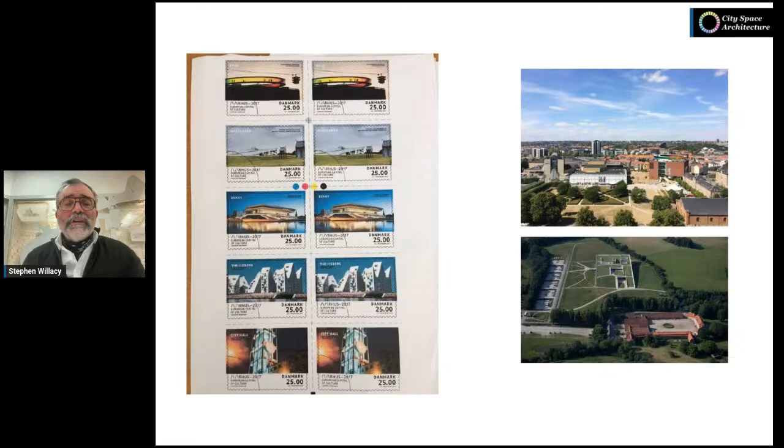We're also a renowned center for business, with lots of different business clusters. We are the world's windmill capital in Aarhus, with research and development for nearly all the windmill companies, and it's also an important harbour town of course. We have an agro-foods park, lots of different design and robotic studies going on in the university itself. But of course, when we talk about our city, how it's growing, and how we can communicate with each other, the Sustainable Development Goals has become quite an important tool.

So we're roughly speaking the same language with each other. I think it's important that we bear this in mind as the whole paradigm of putting people first when we talk about making our cities. We've often asked this question, borrowed from Jan Gehl: look at the city life before looking at the urban spaces, then we can look at the design of the buildings. Obviously it's not linear, it spirals back and forth. But for many years, it's been a case of designing buildings and there's some space left over. I'll return to this theme as we go along.

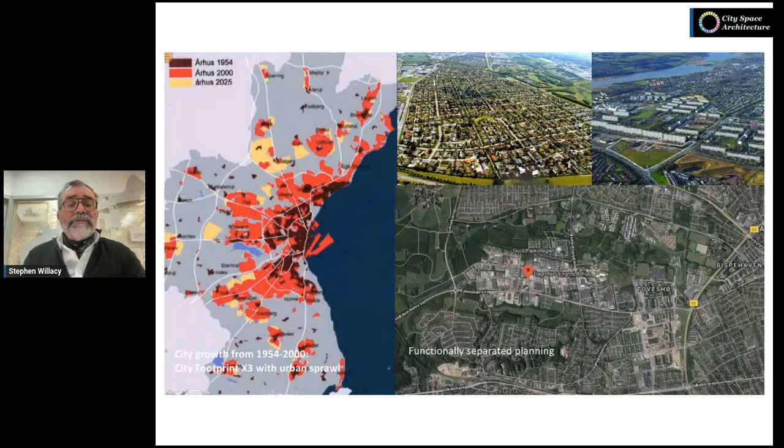This is an image of Aarhus from just post-war. The dark area illustrates the footprint at the time, and then 2000 shows the actual footprint, because we built all these single-family homes, which is very popular, along with functionally separated planning, where we have social housing along the outskirts of town, along the ring road, and also industrial areas on the outskirts. The yellow areas, which I'll come on to, are areas with polycentric development taking place as we've been planning forward.

So managing the growth: the image on the left illustrates the way planning has been post-war, and now we're trying to convince ourselves, or work closely with the idea of mixing different activities—work, recreation, living—so you can make it more walkable, accessible, cyclable. We like to work with this, making more vibrant, sustainable neighborhoods. Some people call them 15 or 20-minute communities. Others—I'll show it later—we're also discussing the idea of 5-minute communities where everything's very accessible.

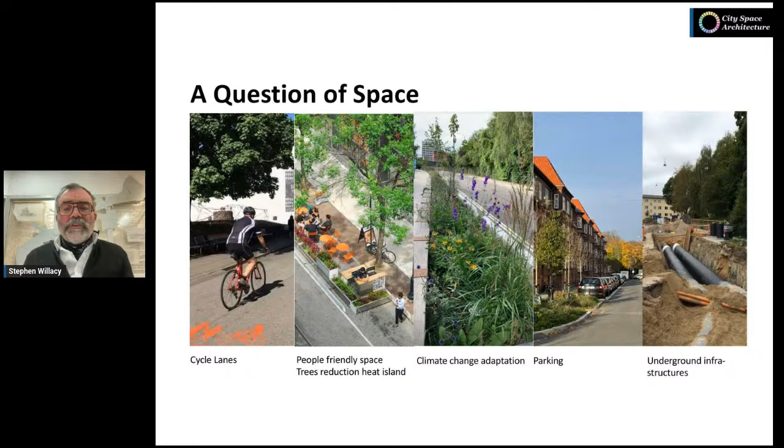And of course, people would like to have cars in their neighborhood close by. But there's also a lot of infrastructure underground, which makes it difficult to plant trees on top, and they also have to be serviced. So with all these different things, what gives? How do we make the mix work?

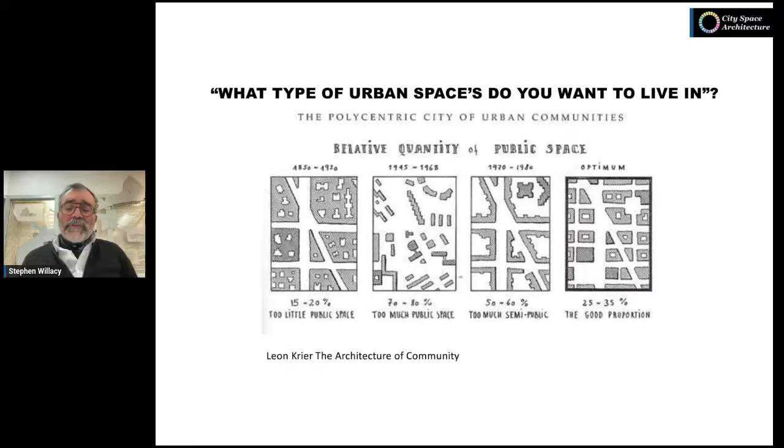The other discussion is the quality of the urban realm. These are illustrations from Leon Krier from his booklet, The Architecture of Community. These are very key illustrations, and I've used them quite a lot to illustrate the challenges we've been facing. You can see here typical examples.

The one on the left is from the old historical heart of Copenhagen, where there's too little public space. The next illustration is from Gellerup Park in Aarhus, where there's a lot of public space, and too much semi-public space. This is an image I found from Ørestad in Copenhagen, but I couldn't find a decent image in Aarhus. These are just some examples.

Whilst the one on the right-hand side is a project I'd like to illustrate towards the end of this talk.

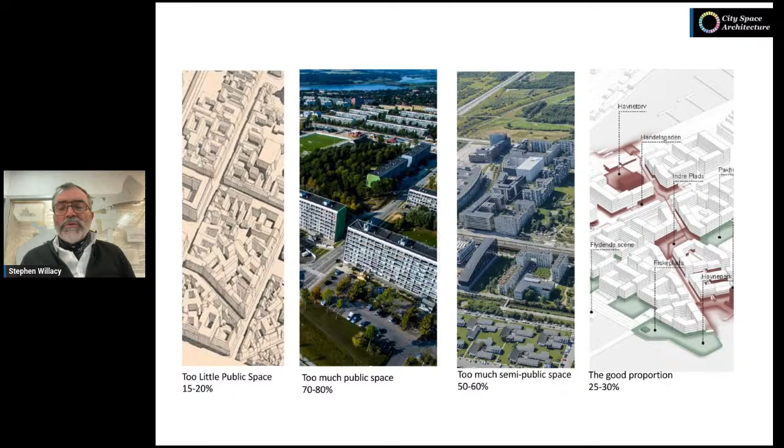I'd like to make this abrupt comparison between the readable and recognizable city from those early illustrations shown previously, and the indistinct city with blurred boundaries between public and private areas. You can see this with the typical modernist housing scheme from around the 60s and 70s. It's important to remind ourselves of these ideas, which are coming into play more and more, because we're having to repair upon these ideas which have caused some challenges for us.

One of my icons in urban planning is these ideas developed by Hermann Hertzberger and many other architects, the discussion relating to thresholds. I think it's very important when we distinguish between the idea of public and semi-public areas.

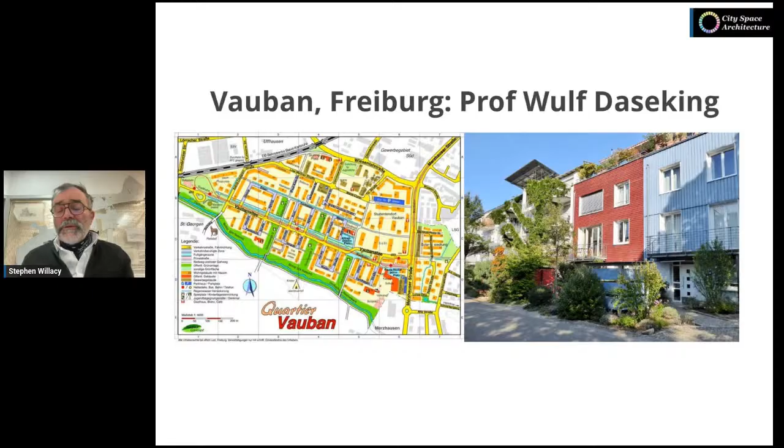Another beautiful example is this one in Vauban, Freiburg, where Professor Wulf Daseking worked with a lot of people developing two new towns, polycentric towns on the outskirts, but linked together with the inner city by public transport. This is something we've looked at very closely.

It's a beautiful example of how they've managed to think holistically, keeping the density at a reasonable level, but also integrating all the climate challenges into surface drainage in the area.

The car parking is in parking barns on the outside edges of the community, so there's very little need to drive into the centre. It's important to remember they've also incurred quite a large expense on parking spaces, so a lot of people decide to use public transport instead.

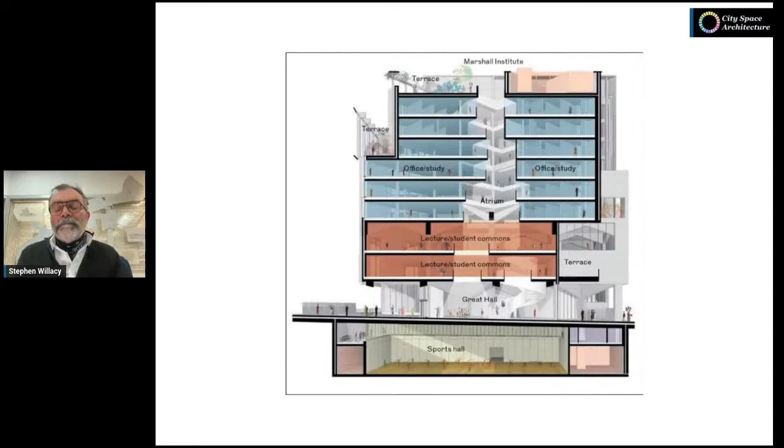And you can see that through the section of the building, the urban realm runs through the building. It's accessible, you can wander through it and look up through the building itself. The common areas are the areas in red, and there are two floors above which are accessible by a beautiful staircase. I love the landscaping here that explains this possibility.

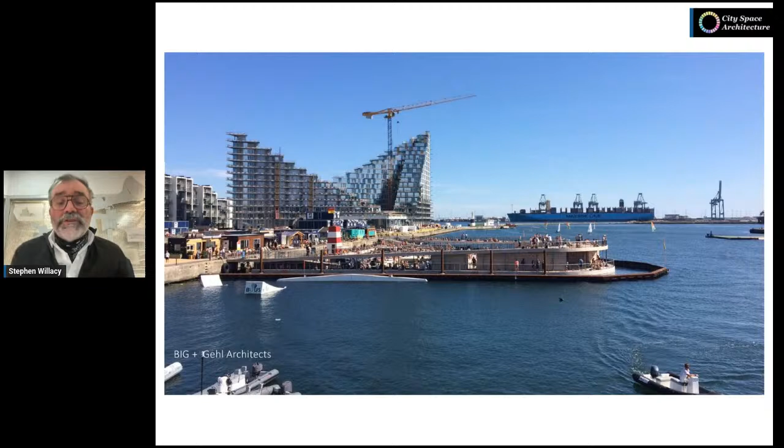The former container harbor on the right, out in the bay, we have this beautiful harbourfront along Basin 7, where we had the fortunate sponsor of a Salling Foundation to build this basin. And I must say it's been a magical success.

When we talk about the urban floor, here you can see timber floor, obviously near the basin. Along the edge of the building site, the council, together with the developer, built this idea of, whilst we're waiting, making a livable building site fence. So these containers and different activities were developed with very cheap rents, encouraging people to use this space whilst the projects were being built. It became a fantastic destination in itself, very quirky and interesting compared with the very polished newer developments in the background.

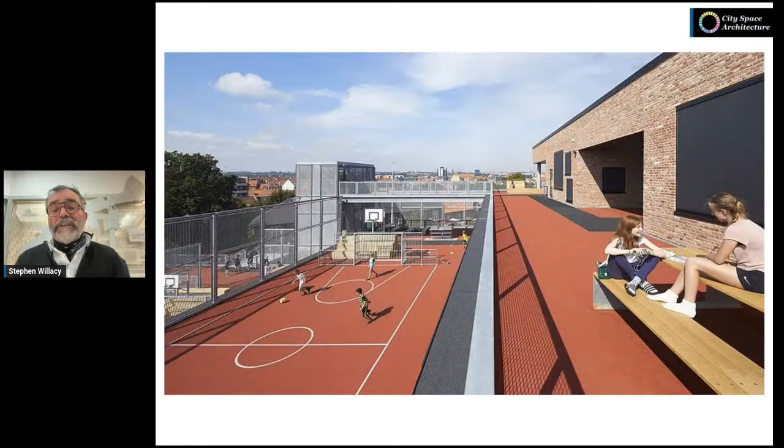Again, here there's a kindergarten integrated in the school with play areas involved, which are accessible during the weekends as well and at night time.

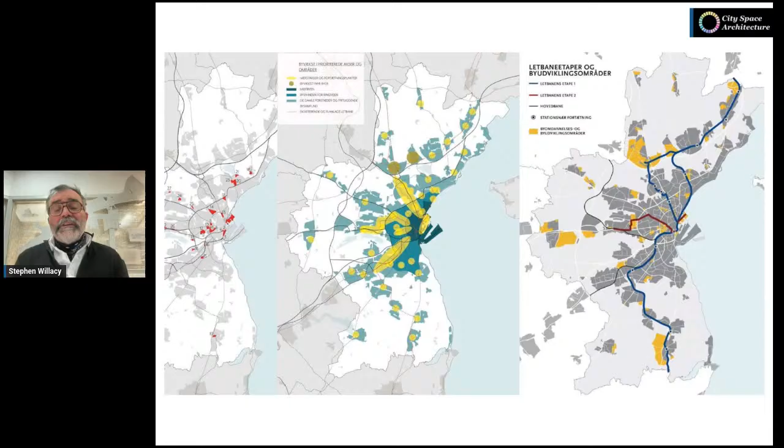Back to this, with the idea of transport-orientated development, where densification can take place along, for example, those yellow areas - those yellow extended ellipses, where the public transport for light railway corridors have been designed. The red one on the right is one which is currently being planned to become a light railway, maybe combined with BRT. But all those industrial brownfield sites, the red ones on the left, many of them are integrated into these transport corridors.

And it's been a very successful approach to densification. These are many of the different TOD policy goals in relationship to socioeconomic, social, environmental, and social cultural aspects—very significant. The idea is making the city more accessible to more people at all times of day.

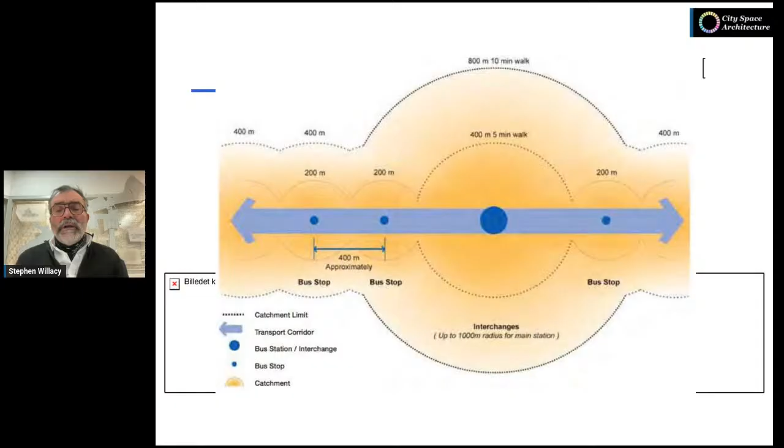This idea of being able to densify and use the local stations as a possibility to identify, using bicycle areas or distances as an important driver. We find that property ground areas near stations are becoming more expensive because developers are buying them and intensifying these areas, encouraging growth around them, so hopefully fewer people need cars, or there's a reduction from 2 cars to at most 1. This has been monitored.

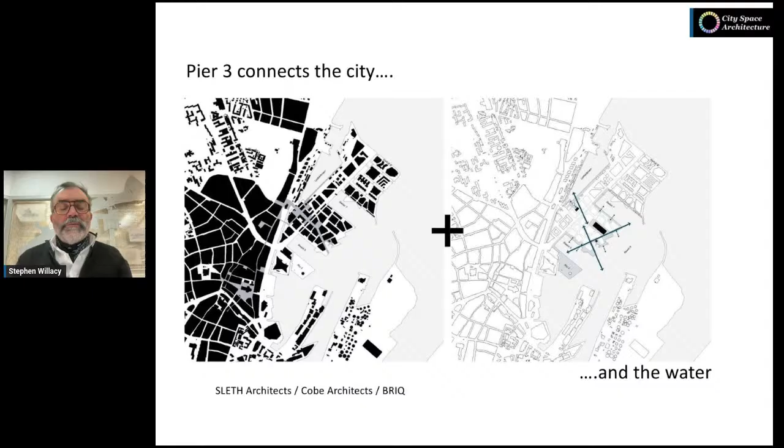These are some really beautiful diagrams, just made public in a citizen engagement meeting. It's very nice to share the possibilities, because I showed you earlier the quality of the urban realm in those illustrations from Léon Krier.

This is the example I'd like to share, because we're talking about getting the mix right while making good urban spaces. The buildings are, I think, a maximum of 6 stories high, which is the normal maximum height for typical housing in the older part of town. But the whole idea is integrating greenery into the town—you can recognize some images, like the parking building I showed from Copenhagen.

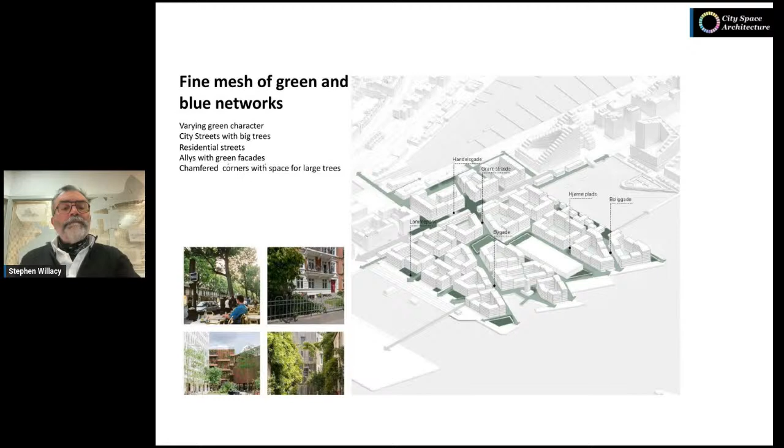So this mix is very important—the heritage, can we use some of the existing buildings? Of course. This is an important driver now in terms of CO2 and life cycle analysis.

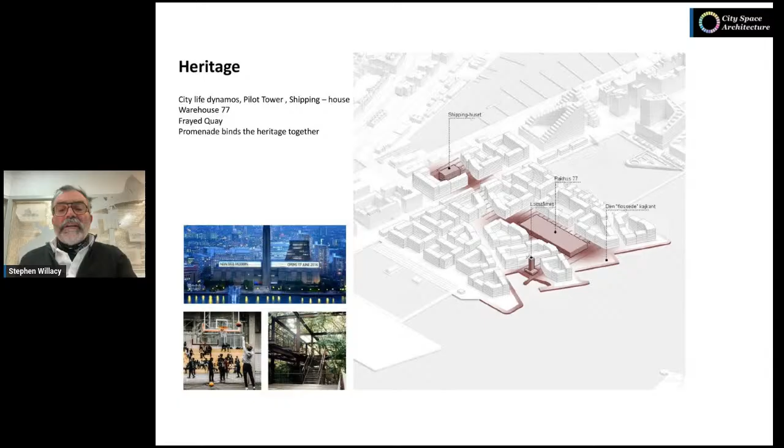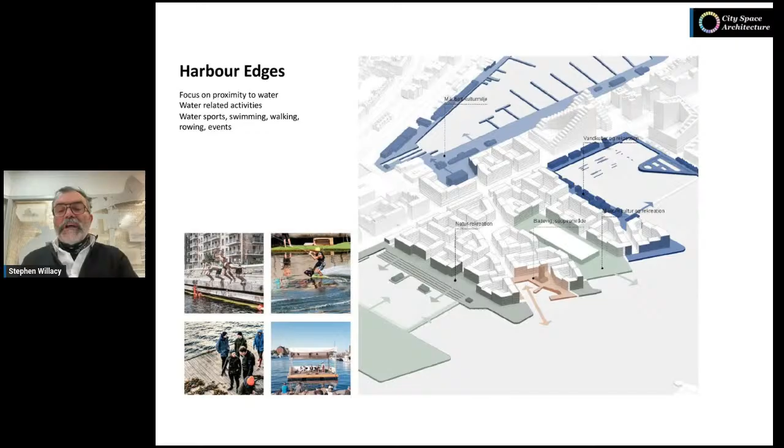Some of these illustrations are prioritized, but they're all thought together—like this one on the harbour edges, the focus on proximity to the water, how different areas have different characters, water-related activities, and building bridges across to the different piers. This is very early work, not cast in stone yet, but it's a very good starting point for the discussion taking place.

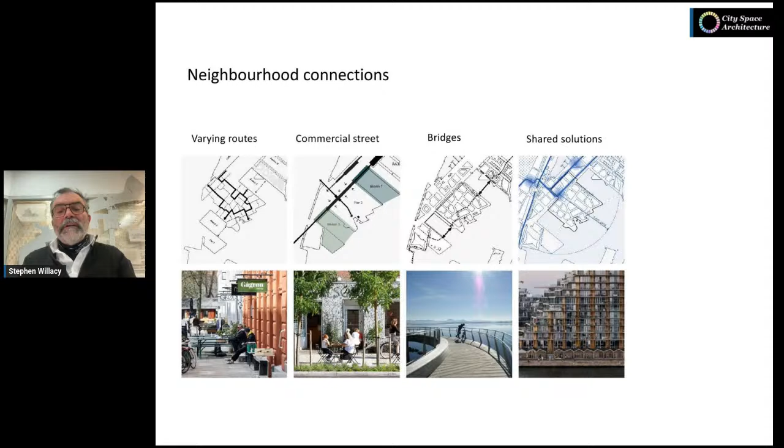Very good start. And all these different layers here about the neighborhood connections, the varying routes, a new commercial street which is being planned, bridges across, and the shared solutions connecting to the inner city.

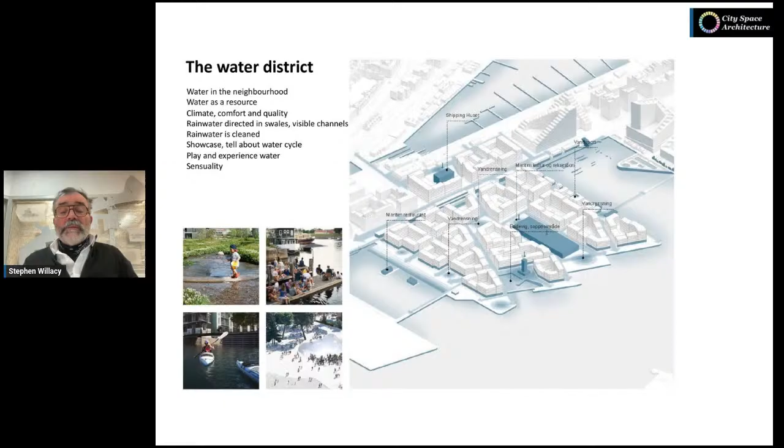And similarly here, this whole idea of making a water district, integrating water into the neighborhoods with water cleaning areas, swales and visible channels, as I illustrated from places like Freiburg and Cambridge. Also making it visible in terms of learning, making people aware of the challenges we're facing, learning about the whole sustainable agenda in terms of tidal heights and things. City life and livability is a very important point for, I know, the politicians. It's a cardinal point.

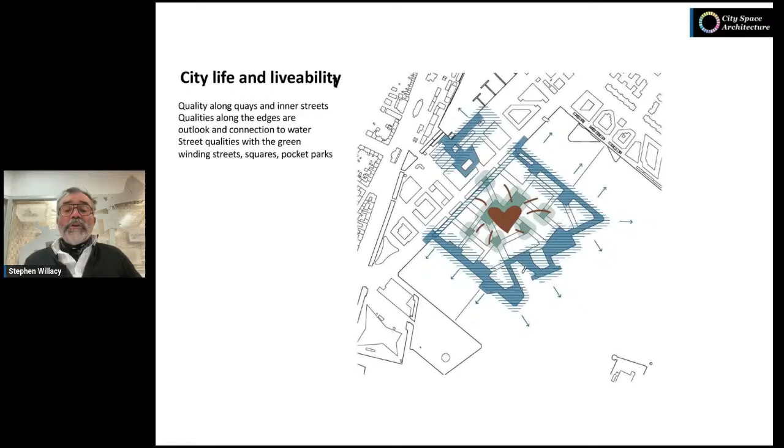And also the whole idea that minimum 25% of the housing will be social housing, housing associations, student housing, different types of citizens. Different types of urban spaces, water spaces, winding streets, squares, pocket parks, and so on. All these different squares and typologies are coming into play.

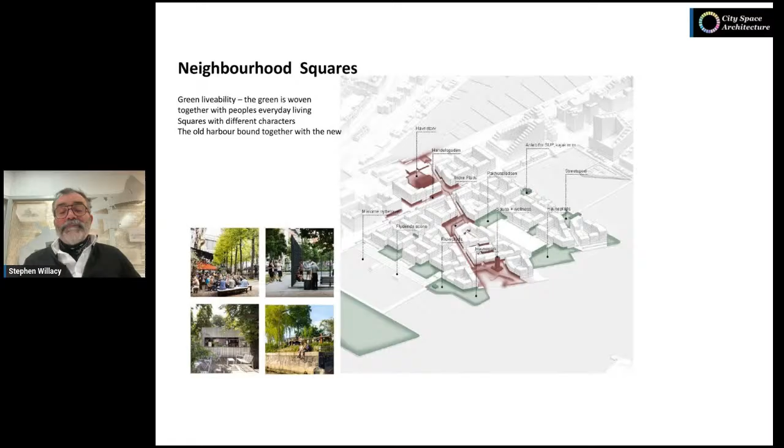This is going to be fantastic. I know it is.

So finally, I'd just like to go through something in terms of reimagining the public spaces. Tactical urbanism and prototyping is something I'm very keen about.

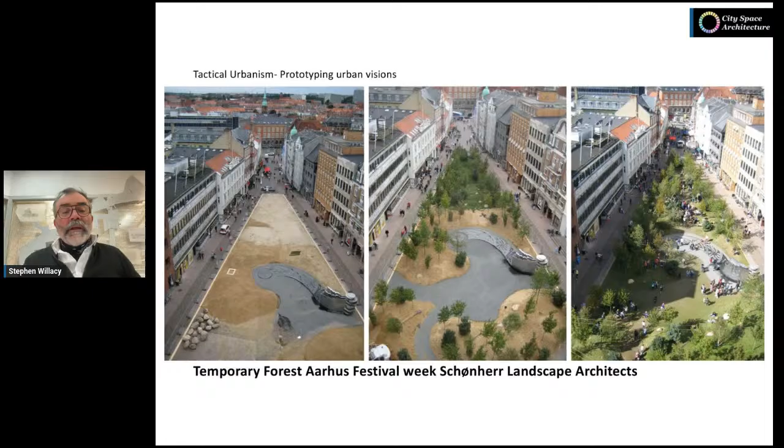This is an example from like 15 years ago from Aarhus, where Schønherr Landscape Architects worked with the City Festival Week and introduced this forest for 10 days. It was an incredible success and caused a big wave of discussions where the politicians started asking the question, why isn't our city more green? We can do more about this.

Look, this is like this 24 hours a day. And during the mornings, the kindergartens were brought into the area and they could run riot here. It was very, very popular.

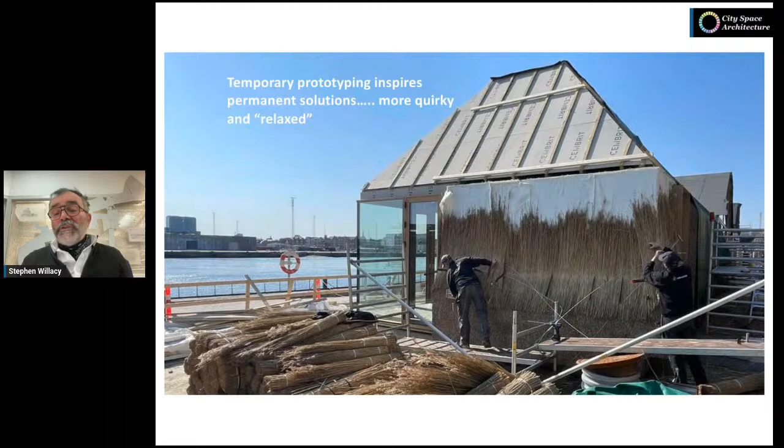And it was planned to make something a little bit more streamlined at the time when they did the master plan. So this quirkiness and the idea of the architects who were big talked with the council and the firm called Institute for X, who actually built many of these containers here, and designed a new type of shops, restaurants along this harbour front, introducing another scale, but they're built in burnt wood, cork, glass, timber, and thatch.

And I mean, the sensory aspect of this whole area has just been uplifted. It's a very popular area now, and it's become a destination just to come and see what's going on, maybe have a bite to eat or a cup of coffee or a beer or something. But it's a way of making architecture interesting, the urban realm interesting as an attractor.

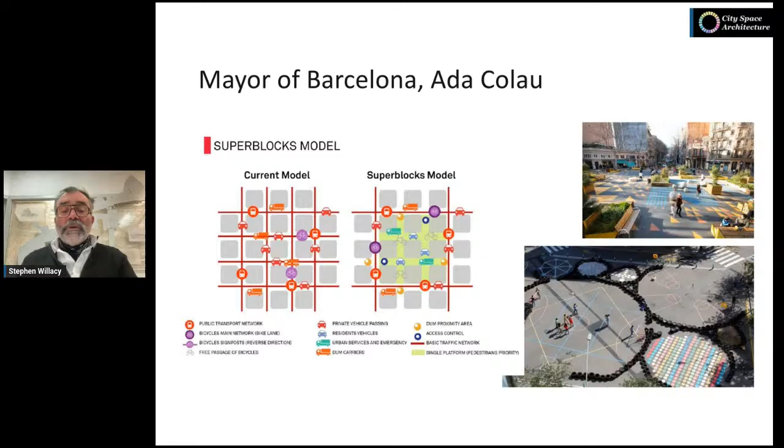Similarly, in Barcelona, the super blocks model, this whole idea of moving transport out, so 9 blocks can actually become more people-centric and accessible for daily use. It's not without problems, I know, because what do you do with the 4 main streets? Because there's still the pollution and the noise and so forth in those streets. But there's a very good quality on these urban spaces.